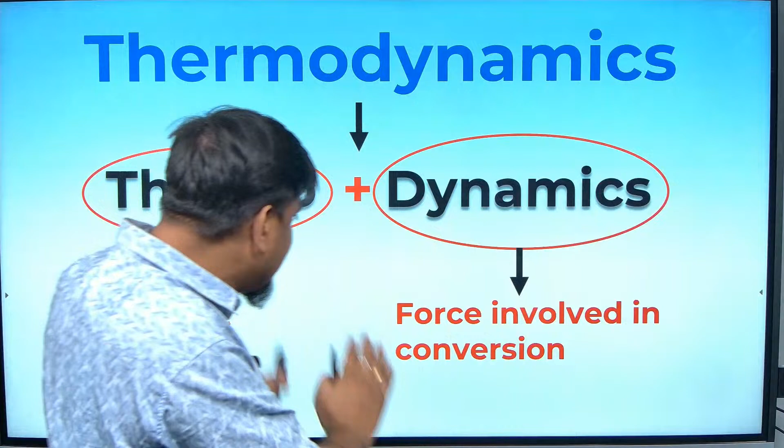So if you remember, you understand that here we are going to learn the meaning of what heat is, and what are the forces involved in this conversion.

So let us define thermodynamics first. As I said, thermodynamics is a branch of physics which deals with the concepts of heat and temperature. The main part here is the interconversion of heat and other forms of energy.

Why are we learning this chapter? Today you will realize that with the help of heat we can do some work, and while doing some work, we can produce some heat. So heat and work are interrelated.

In a lot of mechanical concepts, we use heat engines. If somebody takes mechanical engineering from this classroom, a major part of your four years of mechanical engineering will be learning about thermal effects and thermodynamics only.

That's how important this chapter is, since almost the whole mechanical engineering syllabus is about thermodynamics. So if you are planning to take engineering, it's going to be a very important chapter for you.

Anyhow, let me ask a very basic thing. I have written here that work and heat are interconvertible, that is, work can be made into heat, and heat can be made into work. Generally, if it is cold, what do we do? We rub our hands, right?

Why do we rub our hands? You will say to produce heat. Am I right? When you rub your hands, what happens? Heat is produced. Why and how is heat produced? By the work that you are doing in rubbing your hands, isn't it?

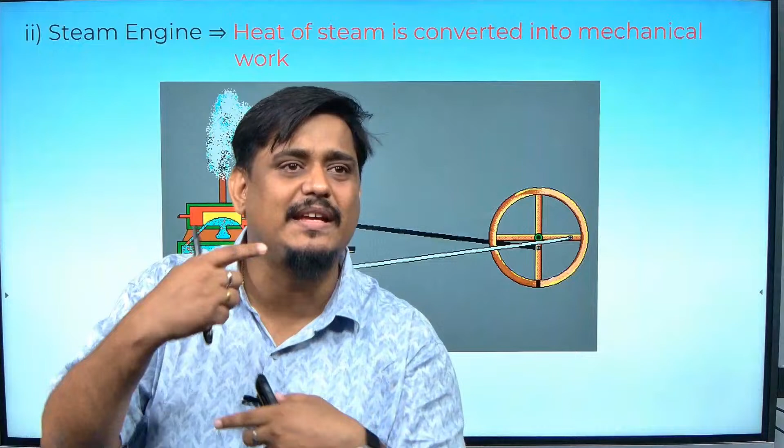Go 60 or 70 years back, all trains had only steam engines, where we used to have a steam chamber, put coal there, burn it, produce steam, and that steam or heat energy would be used to run the engine of the train and carry the carriages, isn't it?

So in this example, we are converting heat energy into work. In the previous example, we converted work into heat energy, and here we are converting heat energy into work. That's what I'm trying to say: heat and work are interconvertible.

Heat can be made into work, work can be made into heat. Remember this in your mind. This chapter is going to, the same thing is going to happen till the end.

Okay, so first we will learn about very basic terminologies. I hope by now, with the help of chemistry itself, you would have learned what is system, surrounding and all these things. Once again, I will repeat anyhow. So what is the meaning of system? Generally, system is anything that you are observing. Even you can become a system for me if I am observing you, if I am studying you, if I am analyzing you.

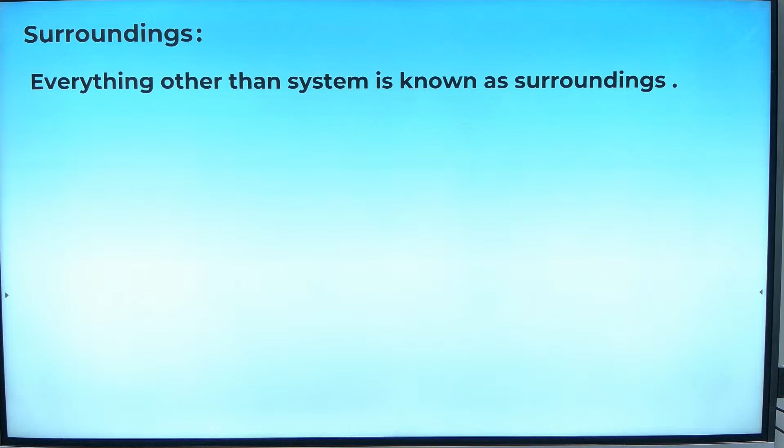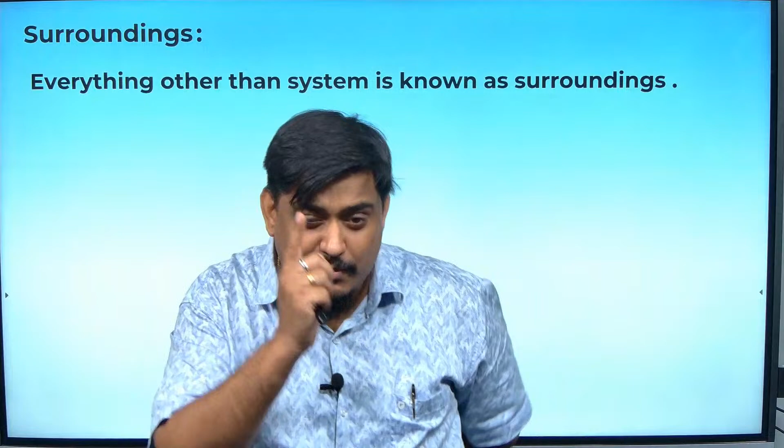So system is anything that is being observed, that is being analyzed, and anything other than system is called as surrounding, isn't it? So for example, if I take Sri Sharan Ram as my system, then everything else except Sharan Ram becomes surrounding for me, and that surrounding and the system is becoming universe for me. Are you getting my point? When I am saying everything other than Sharan, it includes the whole universe.

That's how I am going to say about surrounding. So surrounding is anything, everything other than system, and obviously one more thing, there is a boundary. Boundary is a separation between system and surrounding. Now the boundary is a very important thing here. How the boundary is, how much thick it is. Generally what we study in thermodynamics, we assume the boundary to be a thin boundary, so that it does not absorb much heat, or it does not liberate much heat. So we consider the boundary to be always very thin across the system.

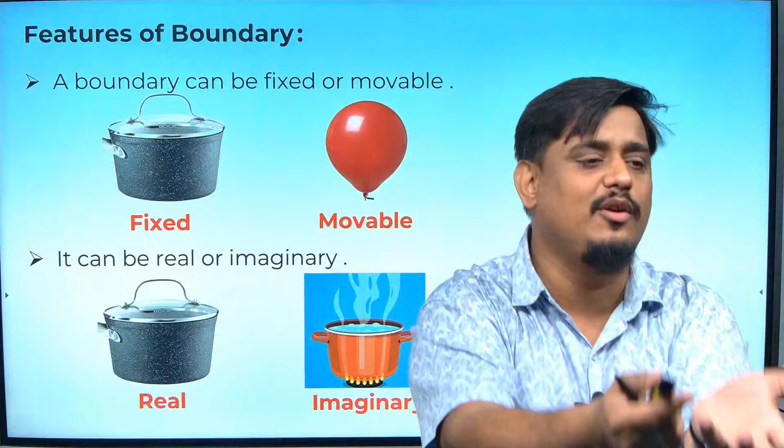Moreover, it can also be real or imaginary. In this case, the boundary is known to you, it is this thing, the vessel. But if you see here, if you are boiling water, if you are making a cup of tea, there is evaporation taking place, you cannot define the boundary of it. It will be an imaginary boundary. So boundary can be real, boundary can be imaginary, boundary can be fixed, boundary can even be a movable boundary.

So remember this, what is the meaning of the word boundary. And I said boundary is always considered to have almost negligible thickness, because you want to avoid any heat absorbed by it or any heat lost by the boundary. To avoid this confusion, we always take boundary to have almost negligible, minimum thickness. Then comes universe. I said universe is everything, combination of system and surrounding. Boundary, everything combined is called as universe.

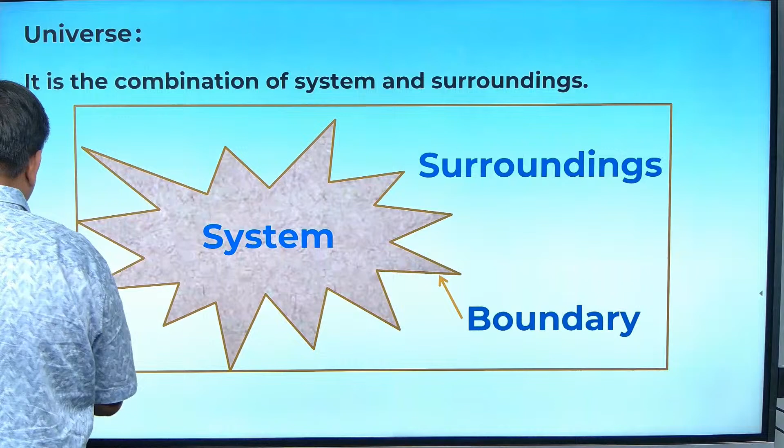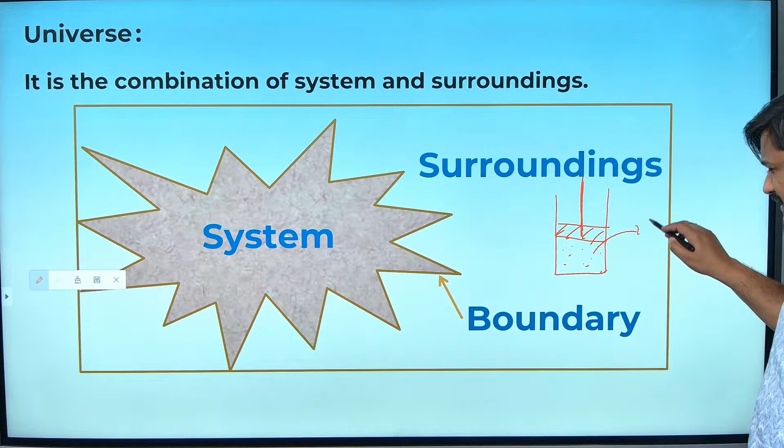So if I am studying something, it is system, everything apart from system is surrounding, and the boundary of system is the shape, I should say. In physics, whenever I say the word system, what should come in your mind is this cylinder. Whenever I use the word system, you should imagine a cylinder with a piston, and the cylinder may be filled with some gas if required. This is called as system. Everything other than system is called as surrounding, and system and surrounding together is called as universe.

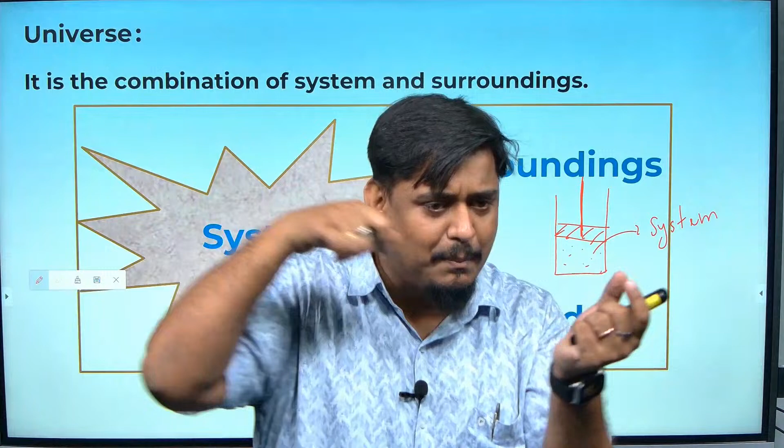The boundary can be of many types, we will talk about that, adiabatic boundary or diathermic boundary, we will talk about that. But here in physics, whenever I use the word system, what should come in your mind? Like a piston and a cylinder. For example, the syringe, the injection that the doctor is using, it's something like that you have to imagine. A cylinder, a piston, a movable piston, and inside the cylinder we may have some gas. Are you getting my point? That is the meaning of system and surrounding in terms of physics thermodynamics.

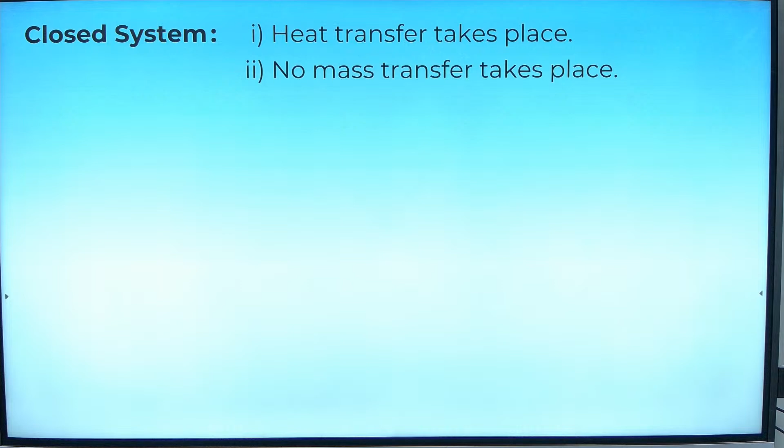Okay, now let us talk about different types of system. So there are basically three types of system: closed system, open system, and isolated system. A system is called a closed system when heat transfer takes place, but mass transfer does not take place. Please mind what I am trying to tell you, this is very important because it will confuse you sometimes.

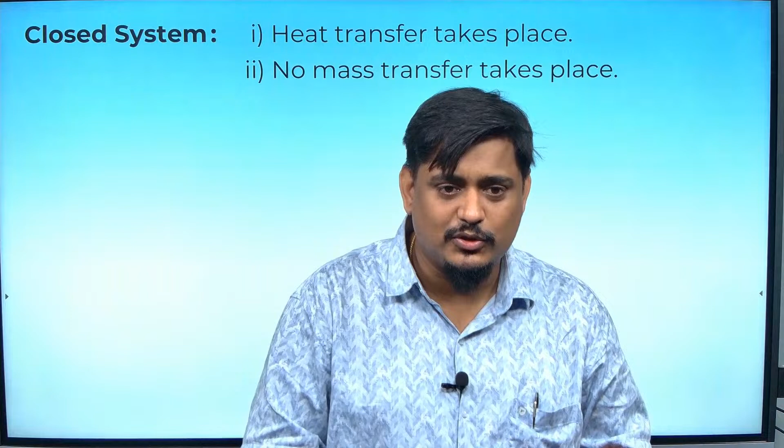In a closed system, transfer of heat is allowed, but mass transfer is not allowed. For example, you are making rice in a cooker. Before the cooker whistles, whatever is inside the cooker, its mass is conserved, because no exchange of mass is allowed between system and surrounding. So we can say a pressure cooker before whistling is an example of a closed system, because when it whistles, it releases some vapor outside, and at that time its mass may reduce.

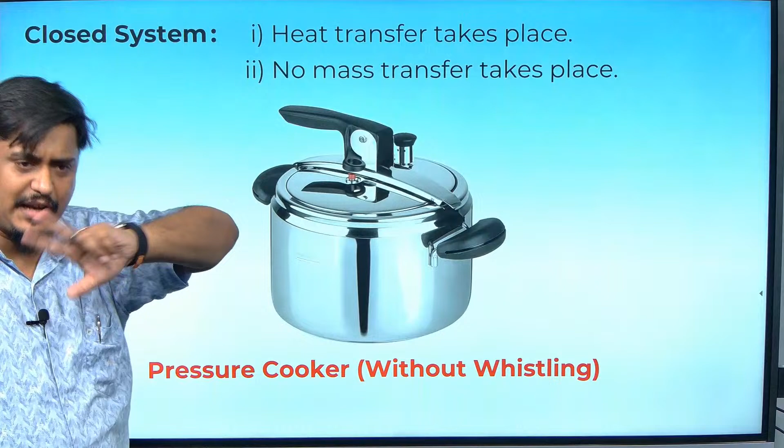So pressure cooker without whistling is the perfect example of a closed system, where we don't have any exchange of mass, but we are allowing heat to transfer. That's why the cooker is getting hot, right? We are allowing the heat to go inside. That is the best example of a closed system.

Then a system can be an open system. What is the meaning of open system? Again, take having tea. We make tea, pour it into a glass and keep it. What will happen? The heat will be slowly lost to the environment. So in that case, heat transfer takes place and mass transfer also takes place. This kind of system is called an open system, where both heat and mass are getting transferred. Example, tea in a cup. Tea is hot, and if you keep it in the cup, I am not saying a significant mass will reduce, but a little bit of milligram mass may reduce, because some of the tea is getting vaporized into the air until it attains equilibrium.

Third system, and a very special type, is the isolated system, where neither heat nor mass will be exchanged. Can you give me an example? A thermoflask, isn't it? Where we don't allow any exchange of heat, and no mass is getting exchanged. So here we are making a vacuum layer between the system and the surrounding, which does not allow the exchange of heat between system and surrounding.

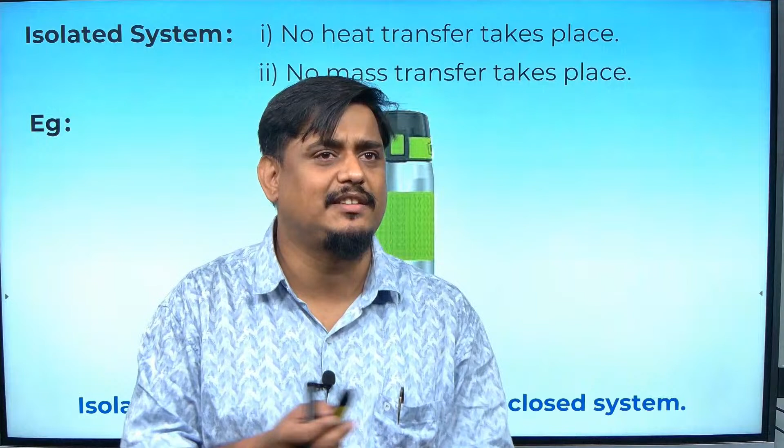So again, I am repeating, there are three kinds of systems. One is open system, where mass and heat both get exchanged. One is closed system, where heat is getting transferred but mass is conserved. Third is isolated system, where mass and heat both are not allowed to exchange. I hope it is clear to you. Very basic thing we are learning.

Now coming to state, these things are becoming a little more technical. Up to now I was talking about only system, surrounding, boundary, and types of system. Now I am talking about the state of a system. State means, for a particular system, what is its pressure, what is its volume, what is its temperature, or in simple words, what are the thermodynamic variables representing a system is called the state of a system. Are you getting my point?

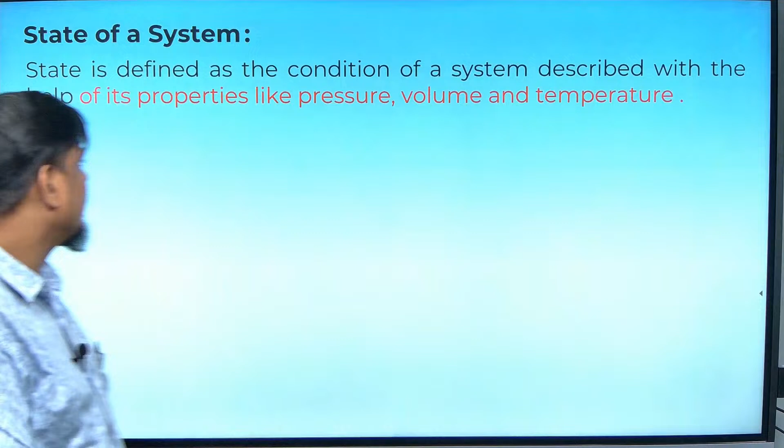Thermodynamic variables means pressure, volume, temperature. These are called thermodynamic variables which directly impact the system. So how can you call a system's state? By what is its pressure, what is its volume, what is its temperature. That defines the state of a system. So how do you define the state? State is defined as the condition of a system described by its properties like pressure, volume, temperature. So for example, I may say P1, V1, T1 as one state, or it may be written as P2, V2, T2, anything. A particular pressure, a particular volume and a particular temperature defines the state of the system.

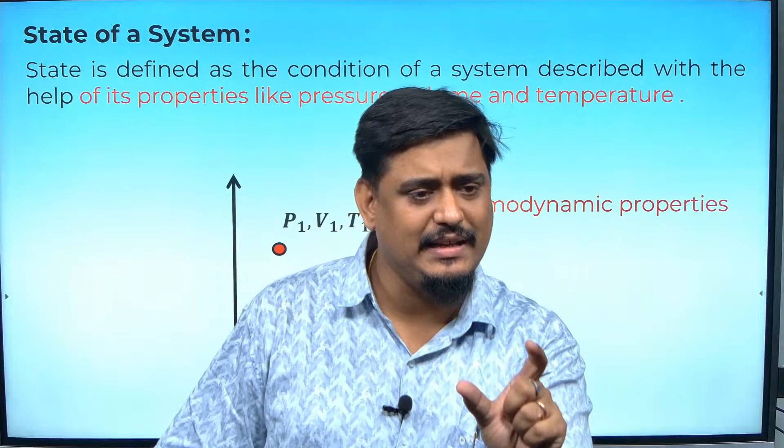Is it clear to you? State means what is the pressure, volume, temperature. It can be some other thermodynamic variable also. Whatever thermodynamic variables are defining a system is called its state. I hope you are clear on this.

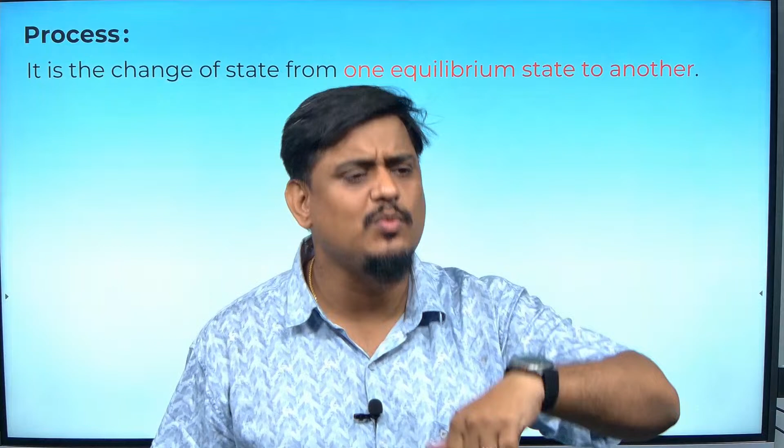So next is process. Process means whenever the state of a system changes from one equilibrium state to another. For example, initially it was P1, V1, T1, you compressed it, and its volume may reduce, the pressure may increase, so it became P2, V2, and T1 may change to T2. So that is called a new equilibrium state attained.

Initially I had a cylinder, I had a piston. It may have a fixed amount of pressure, volume and temperature. I suddenly compress the piston. What may it lead to? It may lead to a reduction in volume, an increase in pressure, or maybe an increase in temperature also, depending upon whether we did it fast or slow, whether the walls are diathermic or adiabatic, something may happen.

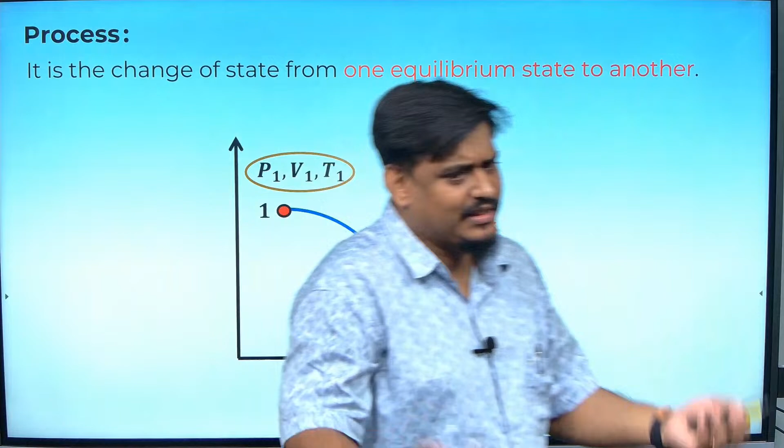If there is a change in the thermodynamic properties or thermodynamic variables, then that is known as the process. So in this case, suppose I am having P1, V1, T1, and it is changing to P2, V2 and T2, then there is a process taking place. The process can be expansion, it can be contraction, it can be anything. So if I draw one graph for you, can you try to find what is this? Suppose I am drawing.

Anything, I am just drawing a random thing here. Think and say what is happening in this process. I will make it simple. Let this be the second question, let this be the third question. First, let me draw it like this.

As the volume is increasing, the pressure decreases. So can I call this expansion or contraction? Contraction, sir? No, volume is decreasing here. Volume is increasing there. Then it's expansion. It's expansion.

How many of you say it is expansion? All of you? Literally all of you? Anybody says compression? You can unmute yourself and speak. Anybody thinks it is compression? Anybody? Kirti, what do you think? It is expansion? Why? Give a try, you may be right or wrong.

Secondary - see here, is volume increasing or decreasing? Kirti, tell me. Volume is decreasing, think and say. Volume is increasing, what about pressure? Increasing or decreasing? So if the volume is increasing and the pressure is decreasing, what can that be - expansion or compression?

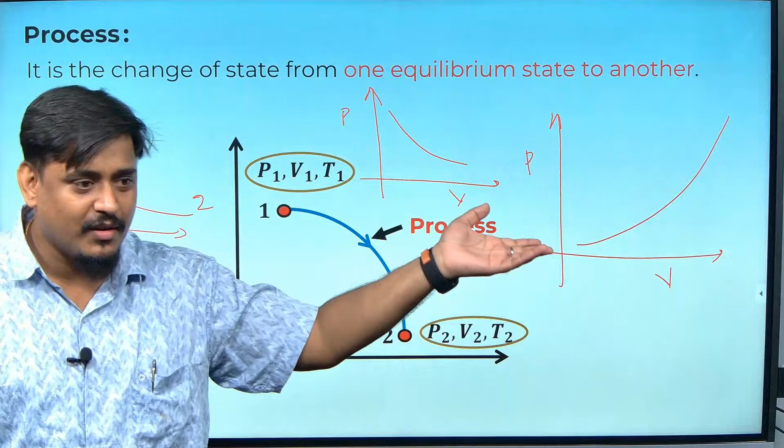We cannot say it is an expansion graph, we cannot say it is a compression graph also. It may be expansion, it may be compression, totally depending upon the path. I'll go and talk about the path next. If the path is like this, then yes, it is expansion, because from 1 to 2 the volume has increased and the pressure has decreased. But if somebody draws the arrow like this, it means volume has decreased and pressure has increased - it's compression, isn't it? Don't you agree with me? So always comment on expansion or compression purely depending upon the arrow sign.

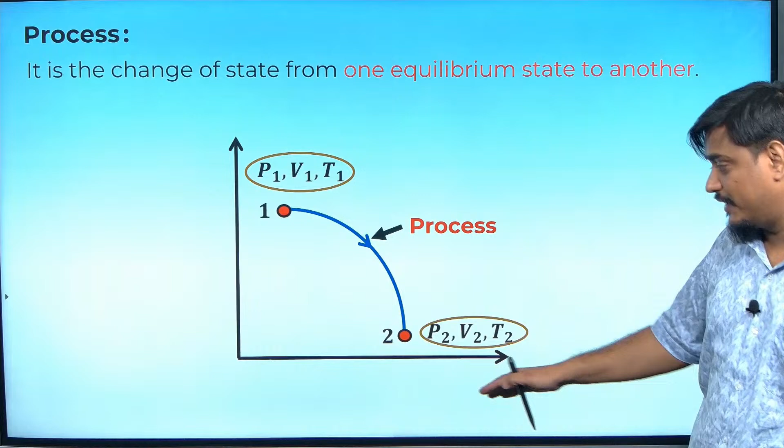So in this case, if we don't know what is P and what is V, we cannot comment whether it is expansion or compression. The graph drawn here by default - if I ask you whether it is compression or expansion, you cannot comment. It is P1, V1, T1, P2, V2, T2, but whether this is V or this is P is not mentioned. Until they mention it, you cannot comment. It may be compression, it may be expansion, it can be anything. So don't judge a graph just by imagining what is P and what is V. Be very careful in understanding which side is pressure, which side is volume, and how it is moving from which point to which point. Okay, can I proceed further?

Okay, I hope it is clear to you what is the meaning of process. So now, what are the different types of process? I have seen children confusing in this, I'll tell you why. One is called reversible process, another is called irreversible process.

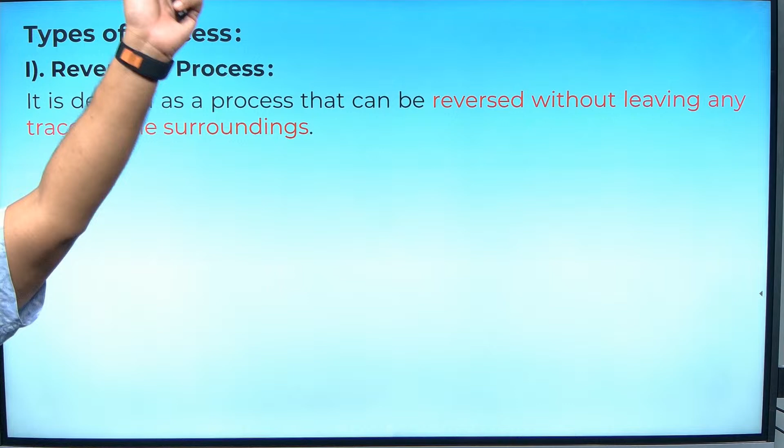What is the meaning of reversible process? Obviously, the process that can be brought back to its original state. That is, if it is having P1, V1, T1, it may go to P2, V2, T2, but it has to return back to P1, V1 and T1. It is defined as the process that can be reversed without leaving any trace on the surroundings.

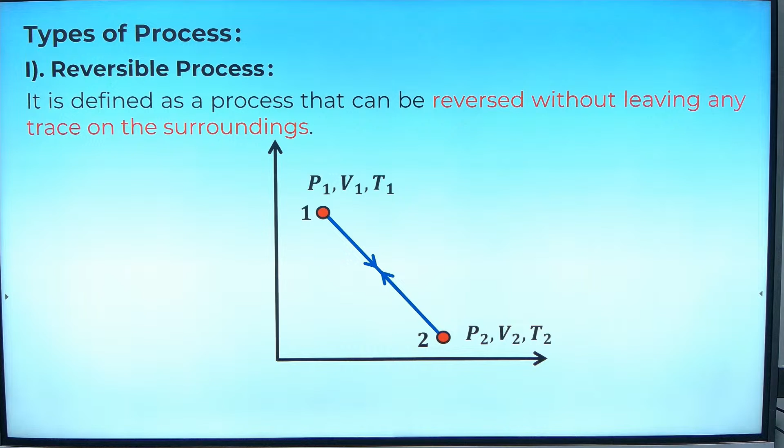That is important, many of you are not minding that. Let me draw a graph and explain this to you. So here, P1, V1, T1 has become P2, V2, T2, and once again from P2, V2, T2 it has become P1, V1, T1. This can be called a reversible process, where the system has attained its initial values of pressure, volume and temperature. I have made an example for you too.

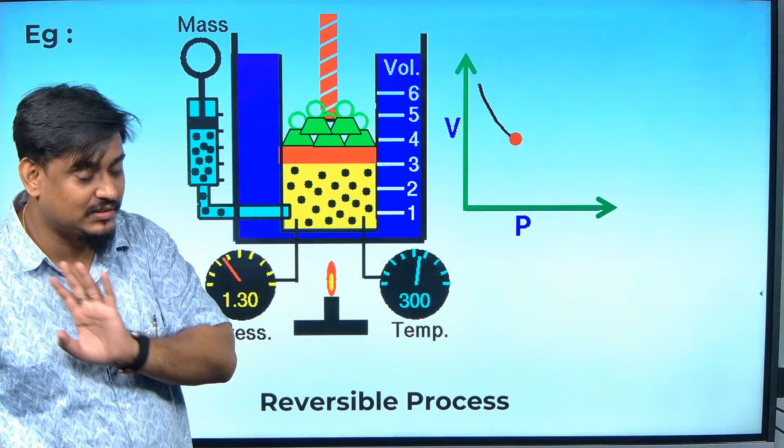See here, the pressure is increasing, the volume is reducing, and once again the pressure is reducing, the volume is increasing. So the path from volume 1 to volume 2, from pressure 1 to pressure 2, is taking the same path while moving back and forth. Remember that, because what I am going to draw next will also look reversible to you.

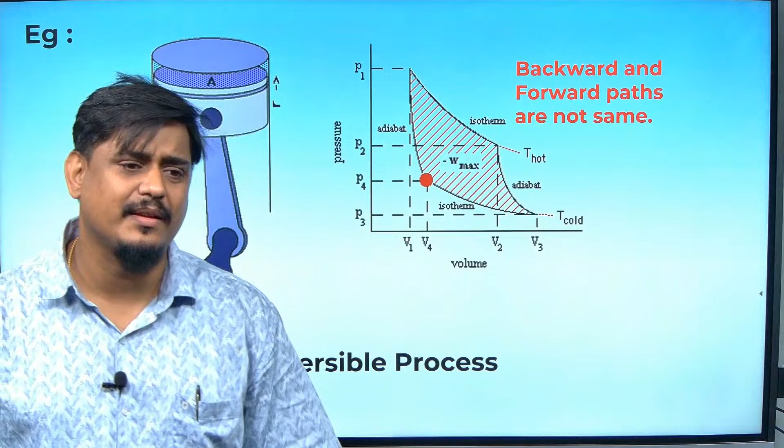But what am I calling this process? Irreversible. Why? Because the path is different — backward and forward paths are not the same. This is where children get confused. They will think this is a reversible process only. No, it is cyclic. Cyclic is different from reversible and irreversible.

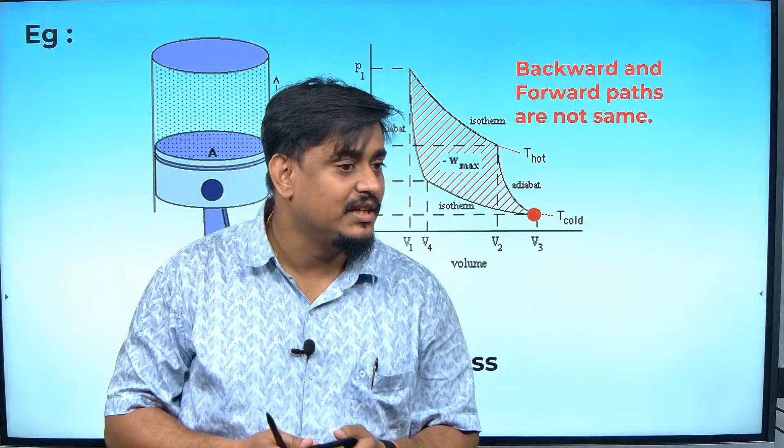Many children think that a reversible process must be cyclic. Not like that — an irreversible process can also be a cyclic process, like here. So the main difference between reversible and irreversible is: in reversible process the path remains the same, but in irreversible process the path is different. Are you getting my point?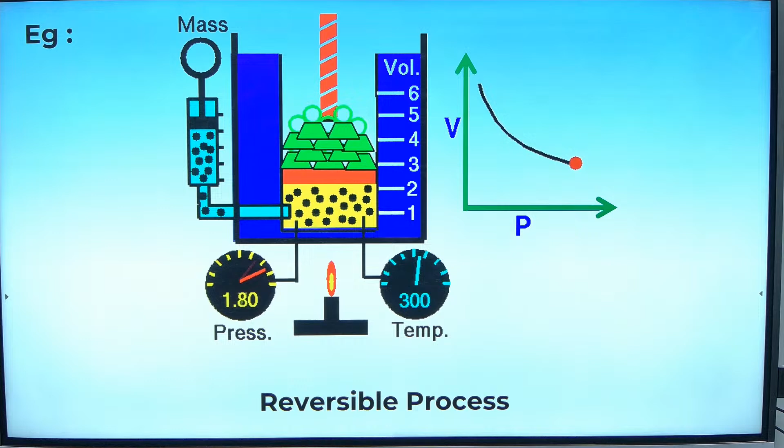Let me go back and talk about this once again. I hope you are understanding this. In the case of a reversible process, the volume has decreased, the pressure has increased, but once again the volume becomes old and the pressure becomes old — and the path it follows is the same, not a different path.

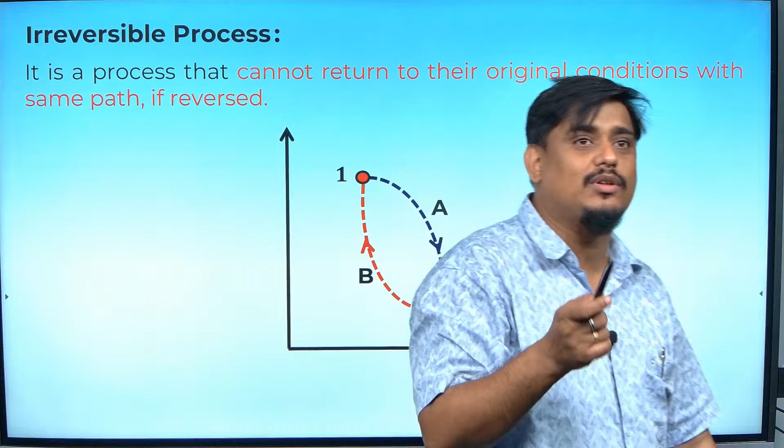So in whichever path it came forward, in the same path it goes backward. But in the irreversible process, the path is different while going back to the original state. It would have attained the same state, but the path it took to come back to that same state is not the same. I hope you are understanding this — 1 to 2, and 2 to 1.

If it is not the same path, then it can be considered an irreversible process. So a reversible process is the one in which the forward and backward paths are the same. Are you getting my point?

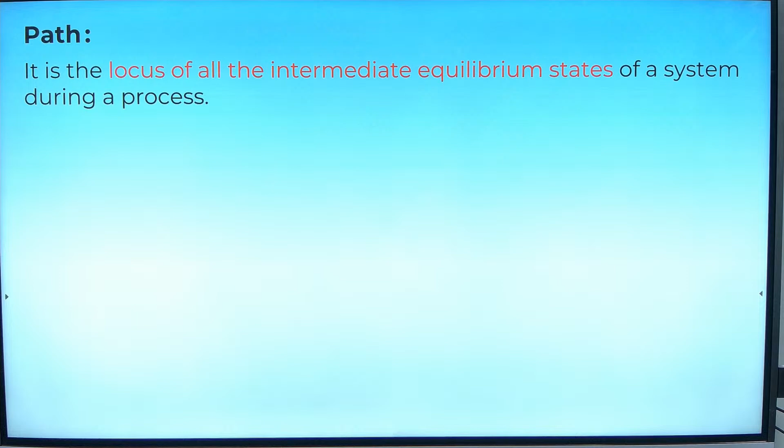I hope so. Fine, now let us talk about path. Path means the locus of all the intermediate equilibrium states of the system during a process. For example, if I have a system like P1, V1, T1 going to P2, T2, then a third point also — this is a path of the system. If point 3 comes back to point 1, it becomes an irreversible path, but a cyclic path.

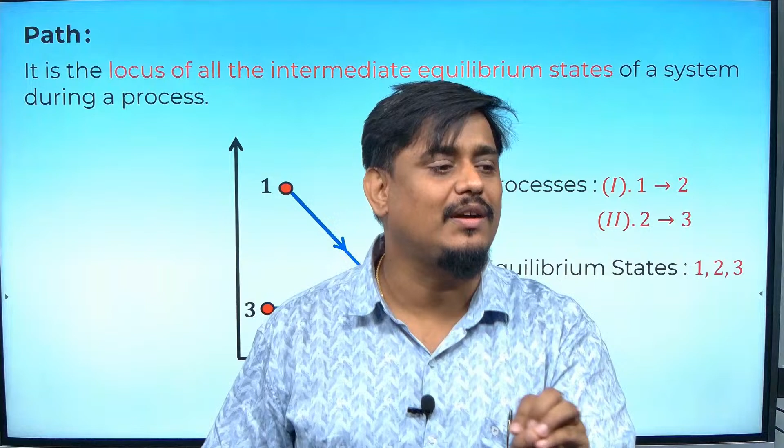Are you getting cyclic? Because from where it is starting, it ends at the same point. See, when I defined reversible process to you, I did not say that if the starting and ending points are the same, it is reversible. I did not say that. I just said that the initial state of the system, the same state can be achieved by following the same path.

Only then is the system called reversible. If the final and initial states are the same, but the path taken is different, then the process is irreversible. I hope you are getting my point. So a path is defined as the locus of all the intermediate equilibrium states.

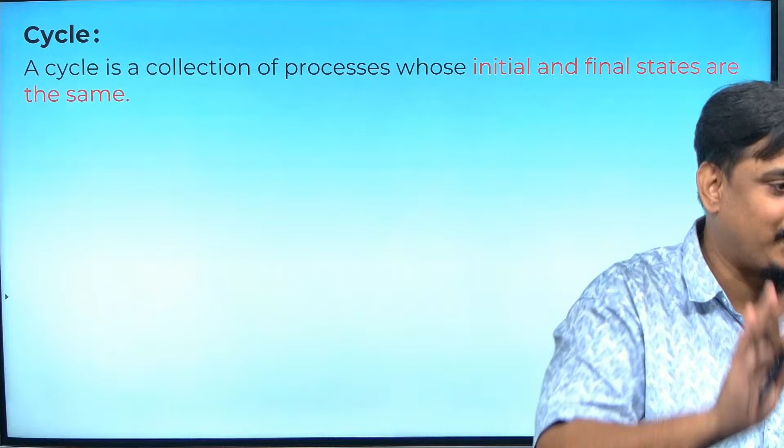Coming back, cycle, as I told you. A cycle is a collection of processes whose initial and final states are the same. Whatever I have drawn till now is actually cyclic only, I have not drawn any non-cyclic process. When the gas has gone from P to V and gone back, that's cyclic. Even the previous graph is cyclic. If the starting point and the ending point are the same, then the process becomes cyclic.

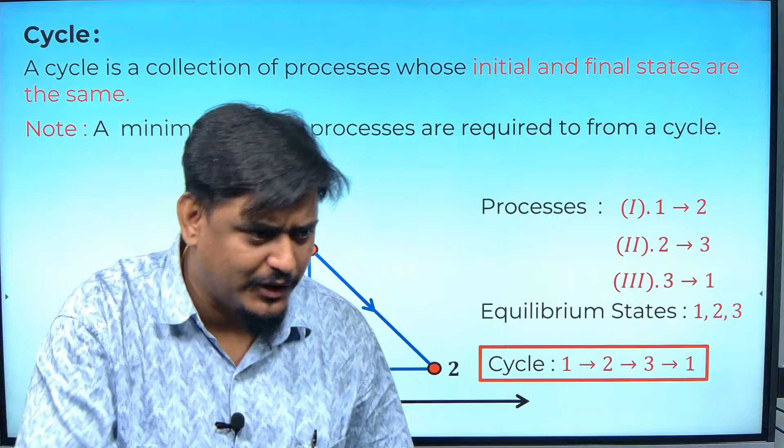Are you getting my point? In this case, there is a path P1, V1, T1, a second path P2, V2, T2, and a third, going 1 to 2, 2 to 3, and 3 to 1. This process can be called a cyclic process, because it has once again reached back to 1. Started with 1, went to 2, went to 3, then once again back to 1. This kind of process is called a cyclic process, because there is a cycle from 1 to 2 to 3 to once again 1. I hope you are understanding what I am trying to tell you. Now comes a very important part.

If you don't understand this, the whole of thermodynamics will become miserable for you. What is the meaning of state function, and what is the meaning of path function? Even in competitive examinations, these terms will frequently come up, and you can understand them only if you are clear on the concepts of state function and path function.

Kirti, you are there in the class, right? Not doing anything else, no? I hope. Okay, coming back.

So, state function. If you see the definition, it is defined as the function which depends only upon the end states of a system. Remember in the chapter work, energy and power, I talked about conservative and non-conservative fields. Gravitation is a conservative field, friction is a non-conservative field. You can recall something like that here.

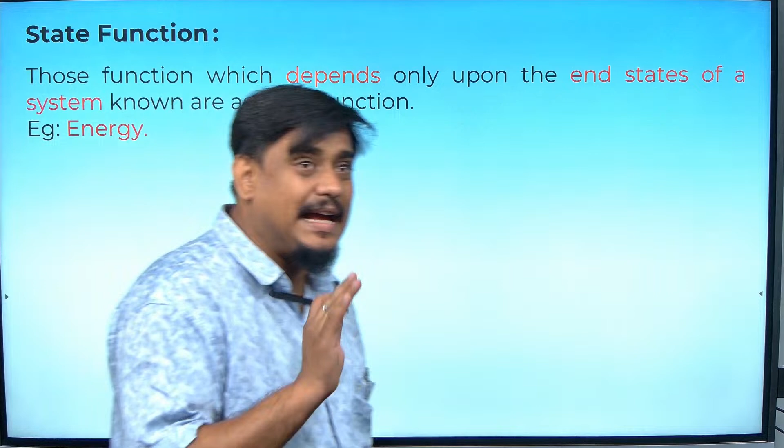Anyhow, what is the meaning of state function? If the function depends only upon the end states of a system, that is, it depends only on the end. It is independent of the path. This kind of function is known as state function.

Energy is a state function, remember that. Whether a process is shifting in this path, the B path, or the C path, energy is independent of the path. So energy is a state function, because a state function depends only upon the end result, the end state. It does not depend upon the path that you are taking.

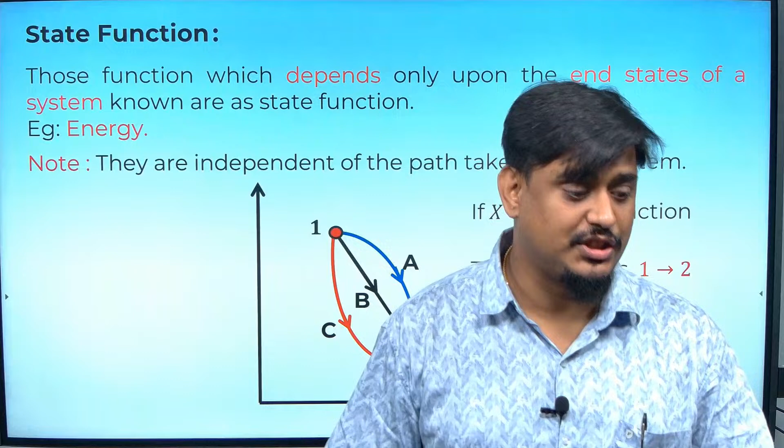Then that function is called a state function. Example of a state function: energy. But in another case, if I am moving from one state to another in path A, and a second process moves in path B, or a third in path C, they are different. That is, the work done along this path, this path, and this path are different, or the heat along this path, this path, or this path are different. Then they are called path functions.

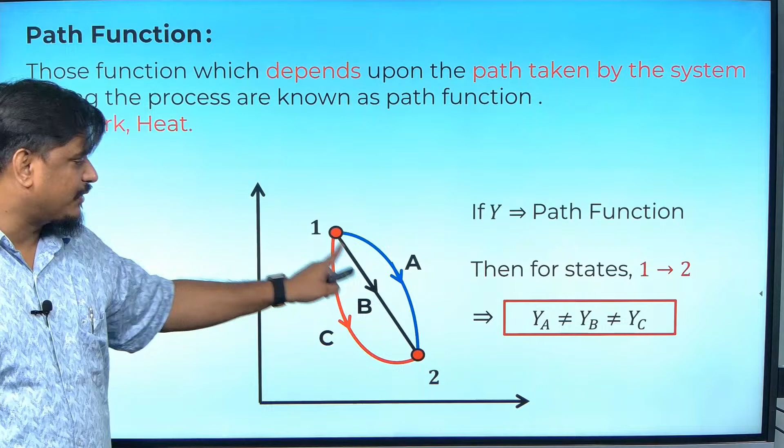As the name says, that function which depends upon the path. If the path is different, the function will give a different result. It does not depend upon the end result, it depends upon the path. That kind of function is called a path function. Example: work and heat. So in this case, the path function of A, the path function of B, and the path function of C are not the same.

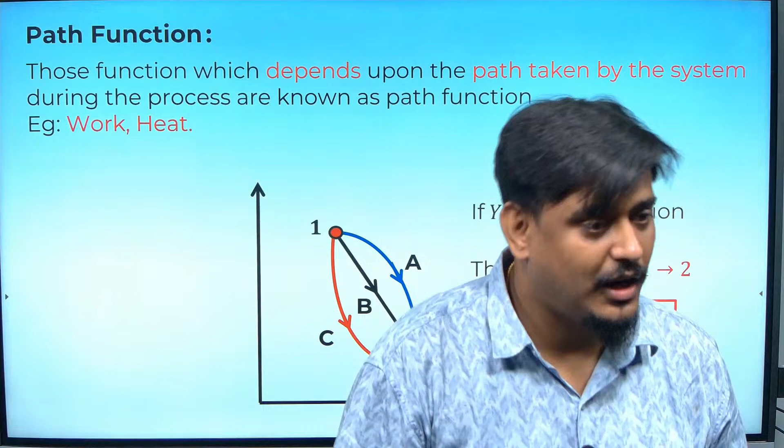Coming back, let us now talk about temperature and the zeroth law. Up to here things are clear. State function example: energy. Path function example: heat and work done. As of now, remember that.

Okay, so I hope you are clear with reversible process, non-reversible process, everything. Slightly confused, sir. In what? I don't get the difference between work and energy right now.

Work and energy? Yes. I understand the problem, because work is also joule, energy is also joule. So how do they differ? Even heat - heat is also joule only, no man? Yeah, heat and joule, calorie or joule, yeah. So you may feel like work, heat, energy all sound the same to you, but why are they calling something a state function, something a path function, isn't it? That's the doubt, am I right?

You will understand now. In thermodynamics, we deal with work differently, heat differently, energy differently. When you write del Q equals del U plus P del V, which is del W, what is the meaning of del U there? Del Q first - heat energy supplied. What is del U? Internal energy. And what is W? Work done. So work, heat and energy are not taken as the same - they are treated differently in thermodynamics.

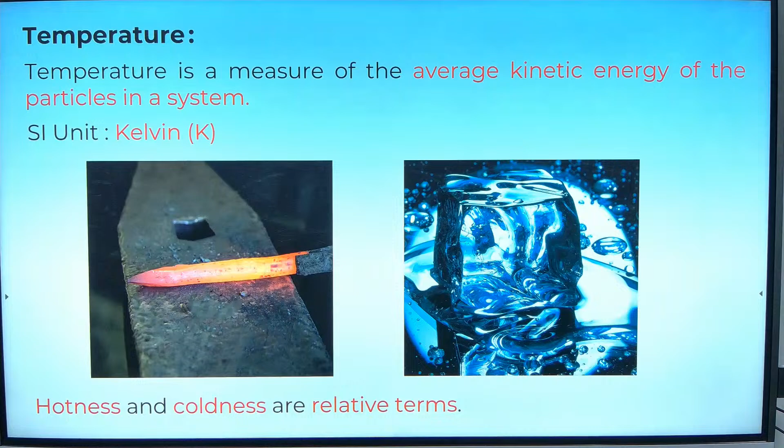I talked about hotness or coldness to you in the previous chapter, thermal properties of matter. I told you what is the meaning of heat, what is the meaning of cold. So hot and cold are different from heat - heat can even be cold, isn't it? That means heat is just the flow, moving from hot body to cold body or vice versa. It can be anything. But remember that temperature is the measure of average kinetic energy of a system.

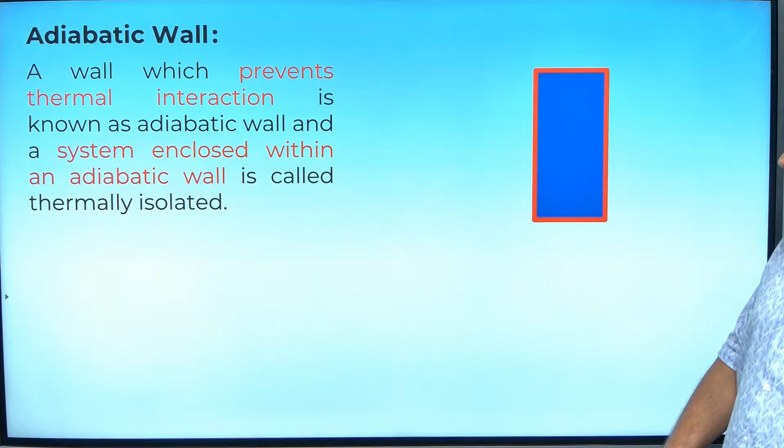So an adiabatic wall is one having an insulating nature. It will not allow the exchange of heat between two systems or between system and surrounding. For example, if you have an adiabatic wall, the temperature will not be allowed to pass through it, because adiabatic will not allow exchange of heat between one body and another, system and surrounding, or between two gases. That is called adiabatic.

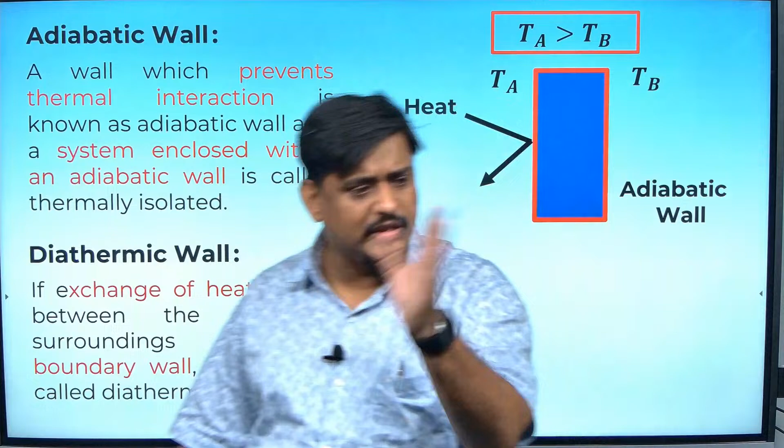Another wall is called the diathermic wall. Diathermic means it will allow the exchange of heat between two systems or system and surrounding, and it will have, you can imagine, something like pores between them - whatever heat you supply will pass through it. This kind of wall is called a diathermic wall. So adiabatic means it will not allow interaction of the system and surrounding, while diathermic will allow the exchange of heat between system and surrounding.

Are you clear on this? Diathermic means the system will allow exchange of heat, and adiabatic means exchange of heat is not allowed. I hope you are understanding.

Now, there are two words here, thermal equilibrium and thermodynamic equilibrium. How are they different? Equilibrium means something should become the same, balanced. Thermal equilibrium is the temperature of two gases becoming the same. If two gases attain the same temperature, they are said to be in thermal equilibrium. Thermodynamic equilibrium means not only temperature, but other thermodynamic variables like pressure and volume also become the same. That kind of equilibrium is called thermodynamic equilibrium.

Are you getting my point? If two gases have the same temperature, they are said to be in thermal equilibrium. If two gases are at the same temperature but different pressure and volume, they may not be in thermodynamic equilibrium, only thermal equilibrium. They may be in thermodynamic equilibrium only if their pressure, volume, and temperature all become the same. Only temperature becoming the same means they can be in thermal equilibrium, not thermodynamic equilibrium. That is, thermodynamic equilibrium is thermal equilibrium plus physical equilibrium plus chemical equilibrium, all together. But thermal equilibrium means only about temperature. Is it clear to you? Thermal means only temperature; thermodynamic means all the thermodynamic variables must be the same.

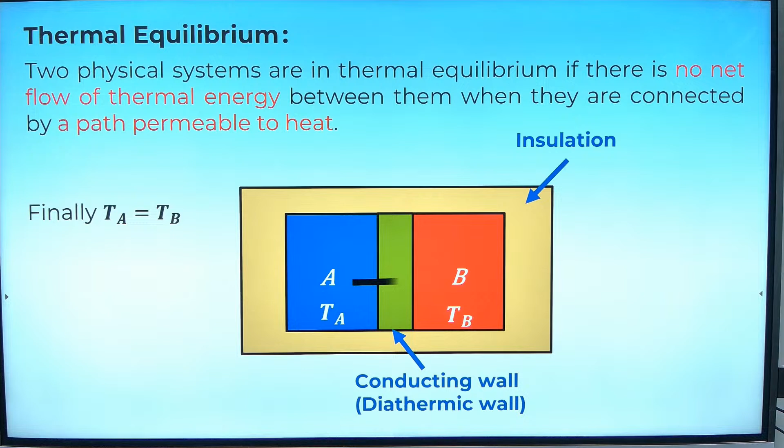So A and B are there, and you connect them using a conducting wall. What will happen? Heat will go from the hot body to the cold body. Within a few seconds, they will attain equilibrium, and that equilibrium is called thermal equilibrium. Initially Ta may be more than Tb, but slowly Ta will become equal to Tb, and then they have achieved thermal equilibrium. If thermal equilibrium is achieved, no heat transfer will take place after that, isn't it? I hope you are clear with the meaning of thermal equilibrium.

Let us talk about this now, a very simple question anyone can answer. If you use an adiabatic wall in place of a diathermic wall, is it possible to achieve thermal equilibrium? No sir, obviously no, very simple. Why no? Because no transfer of heat is allowed between two systems if the wall is adiabatic.

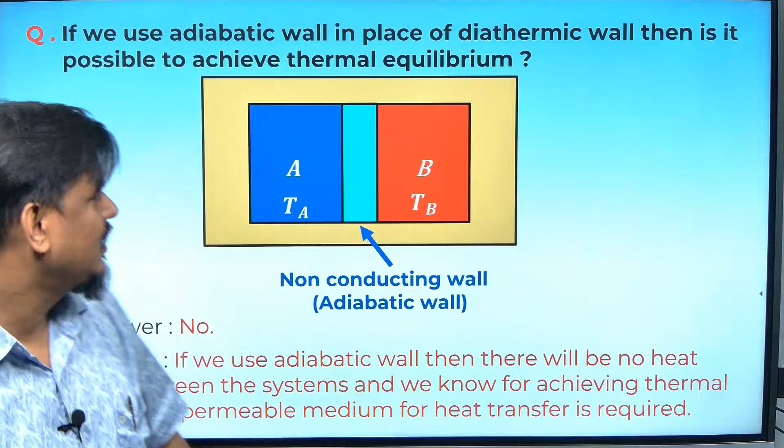Very simple, right. Now let us talk about the zeroth law of thermodynamics. If you ask me why zeroth law, why not first law? Every other law, Kepler's law or Newton's law, we studied first, second, third in order. But why here do we study zeroth, first and second? We could have studied first law, second law, third law of thermodynamics. Why are we studying 0, 1 and 2?

Any idea? So no. Does anybody know the history behind it? Why are we not calling the laws first, second, third? There are 3 laws totally in thermodynamics, but we call them 0th, first and second. Why can't we change it to first, second and third?

Sir, it might be like when they found the first law, after that they would have found this law, but this law might be like, they thought that if they would have found this before, then something like that.

Yes, good, you are correct, absolutely correct. The zeroth law was found after the first law, but it was more basic than the first law. So they put it before first; they had no option but to put 0 only. Since the zeroth law was found after the first law, naming it second or third law would have been irrelevant, the world would later say, what is this? Already the conclusion of the zeroth law is contained in the first law. So that is why they named this law the zeroth law, because it is more basic than the first law of thermodynamics, a very basic law.

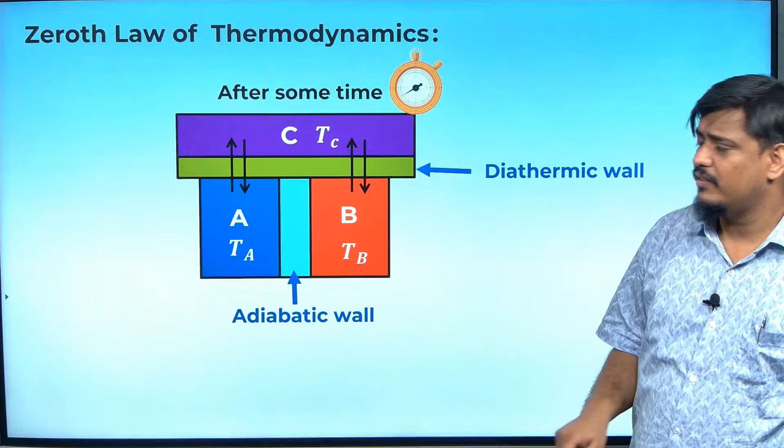I hope it is clear to you. Now what happened? They were left for some time. After some time, don't you think that A and C will attain thermal equilibrium? Same way, B and C will attain thermal equilibrium. So after some time, A and C will become equal, and the same will happen with B and C also.

Then they removed the wall, and now they made an adiabatic wall where there was diathermic initially, and now they are keeping a diathermic wall here. Do you think that now any exchange of heat will take place between A and B? No, it's impossible, because all of them have come to the same temperature.

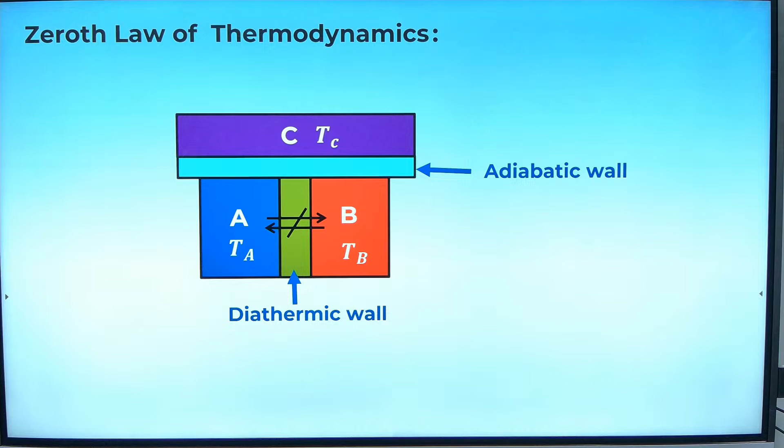A becomes equal to C, B becomes equal to C, so A will automatically become equal to B. If A and B have become equal, then where is the question of heat exchange between A and B? So when we kept a diathermic wall here and checked whether there is any exchange of heat happening or not, no heat is exchanged. This whole experiment is now written as a statement.

What can that statement be? If system A and system B are in thermal equilibrium with system C, then system A and system B are also in thermal equilibrium with each other. Simple, right? If A and B are in thermal, not thermodynamic, thermal equilibrium with C, then A and B are also in thermal equilibrium with each other. I hope you are getting my point.

Anyhow, so the same thing I have told is mentioned here: if two thermodynamic systems are in thermal equilibrium with a third one, then they are also in thermal equilibrium with each other. That is the zeroth law of thermodynamics for you. Simple, you can write it later.

So the first law is actually more linked with the thermal properties of matter chapter. If you are not good in that, you will struggle here. That is when I taught you del Q equals mc delta T, and del Q equals ml, that part will be used here. So caution: if you are not good in thermal equilibrium, today itself go and become good in it. You have the notes, you have the videos, you can see the video, take the notes also. I have taught in detail about what is the meaning of thermal equilibrium, and what is the meaning of del Q equals mc delta T — change of state without changing temperature, and change of temperature without changing state.

You remember or not? Q equals mc delta T. Q equals ml. Yes sir, calorimetry, yes sir. Calorimetry, very good. So if you are good in calorimetry, then this is nothing, just a continuation of that. If you are not knowing calorimetry, then you have to know calorimetry before starting the first law of thermodynamics. Okay, coming to the first law, what does it say.

So before I start talking about the first law, you must understand the meaning of internal energy, right? When I say the word internal energy, when there is a gas in a system, it means gas molecules are there. And these molecules, do you think they are at rest? No, they are in random motion, here and there, moving. If they are in motion, it's very certain that they will possess some kinetic energy.

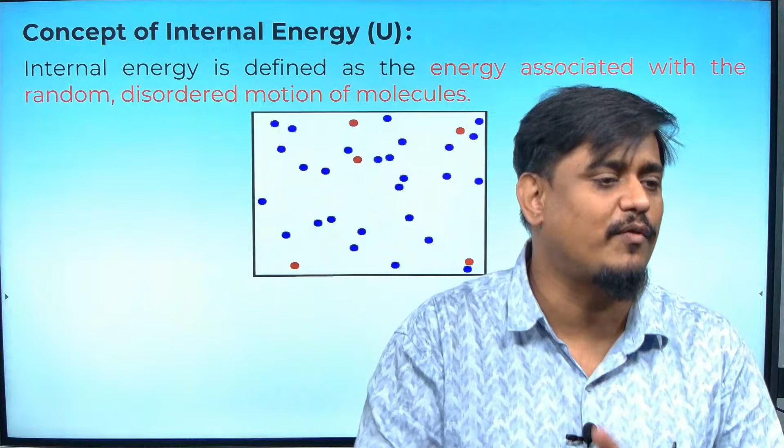Second, their positions or configuration will lead to potential energy. What is the meaning of potential energy? Energy possessed by a particle by virtue of its position or configuration is known as potential energy of the system. So this internal energy is basically the sum of both kinetic and potential energy.

Once again, kinetic energy is coming because of the motion of the particles, and potential energy is coming because of the virtue of its position or configuration. Because of its configuration it will have a certain value. Suppose I am asking this question to you, it is important, please pay attention.

If I am having a system, and I am having this piston which is immovable, I am not allowing the piston to move, and there is some gas inside this, and I heat the gas, what will change? Kinetic energy, sir, kinetic energy will change of the particles. Exactly. So that's why I say kinetic energy is a function of temperature.

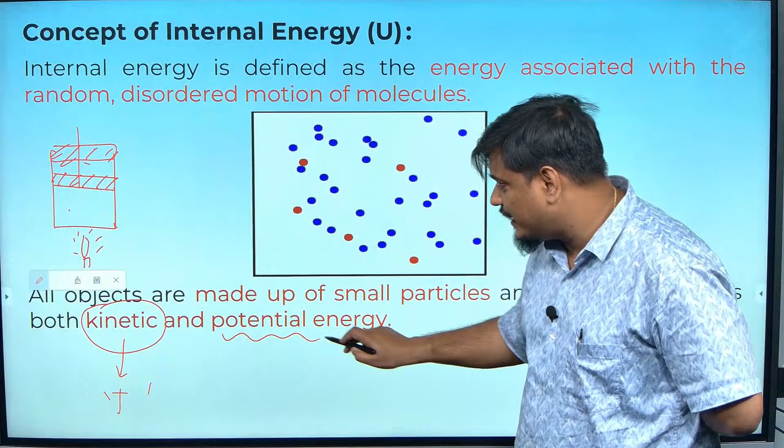Remember this. Second thing, if I allow the motion of the piston, the piston starts going above. If the volume has increased, don't you think the configuration would have changed? If the volume has increased or decreased, the configuration of the gas molecules will change. Do you agree or not? Can I say that potential energy is a function of volume?

This may come in the examination. Kinetic energy is a function of dash - it is a function of temperature. Potential energy is a function of dash - it is a function of volume of the gas. I hope you are getting what is the meaning of volume and what is the meaning of temperature and how it is related. Anybody has doubt in this? I hope no, very basic thing we are learning.

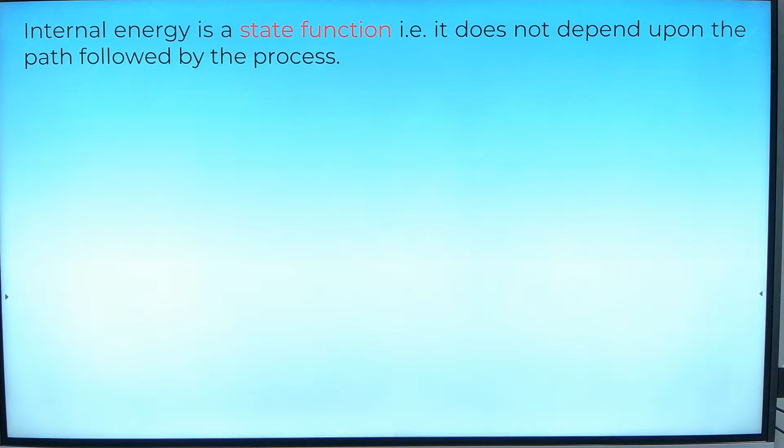So next, again, internal energy is a state function, that is, it does not depend upon the path followed by the process. So I told you energy is a state function, in the beginning itself I told you. Energy is a state function. What is the path function? Work done and heat. Good.

So now it means whether a particular system is moving from 1 to 2 in path A, path B or path C, what will remain same? Its internal energy is a state function, so it will not depend upon which path a system is following. That's why I told you, you should remember what state function is and which parameters are state functions. Energy is a state function, right? So UA is equal to UB is equal to UC. That's what it is mentioned.

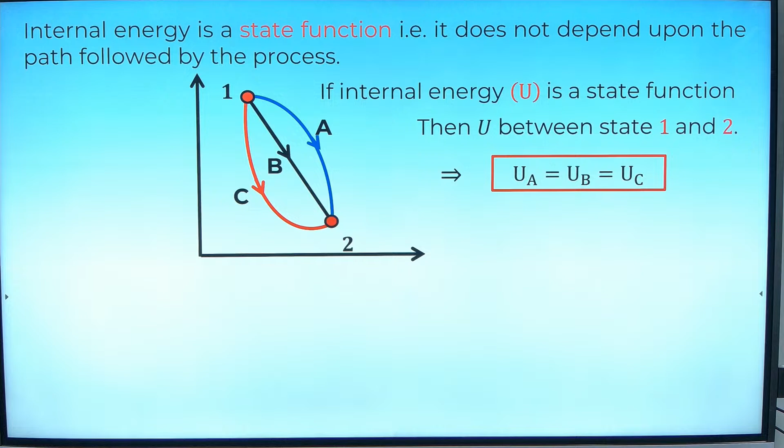Fine, so now let us talk about one simple question. What is the change in internal energy of a process which has final and initial states exactly same? What will happen? Options I will give. Zero. Common sense, sir. Zero, sir. This kind of questions, if it comes, you should dance - it will never come, okay. Obviously it will be zero.

Fine, now let us talk about heat. Because if you remember, most of you may know by now that the first law of thermodynamics is Q, work done, and U. So I am going to talk about each thing one by one, and I will assemble all three and make the equation. So first I talked about internal energy, now I am talking about heat.

Heat is the energy in transfer to or from a thermodynamic system by mechanisms other than thermodynamic work or transfer of matter. So suppose I am putting a burner below a system, what am I supplying? I am supplying some heat. So it is energy in transfer to, like if I am heating by using a burner, or from, meaning the system is heating the surrounding, that is from the system it is coming. A thermodynamic system by mechanisms other than thermodynamic work, that is, you should not move the piston.

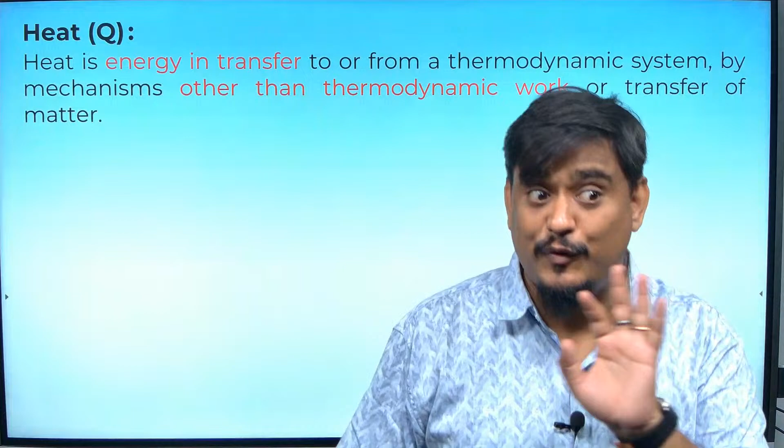Are you getting my point? That is work done, it cannot come under the condition of heat. That may also produce heat, right? If you have a piston and suddenly you move it, it will produce some heat, but that is not the heat I am talking about. This heat is externally supplied or removed from the system because of its interaction with the surrounding. So be clear in the meaning of heat. This heat is not produced by any thermodynamic work. I hope you are understanding something.

So suppose there is a high temperature, obviously the heat flows from where to where? From high to low temperature, always remember that. So heat always flows from high to low.

Now sign convention. Sign convention is also very important in this. Positive, negative, you should know, because when you solve a numerical, it will be used. So if heat is applied, it is positive. If heat is given away, it is negative. Common sense: if heat is coming inside a system, it will be taken as positive heat. If heat is given away by a system, it is taken as negative.

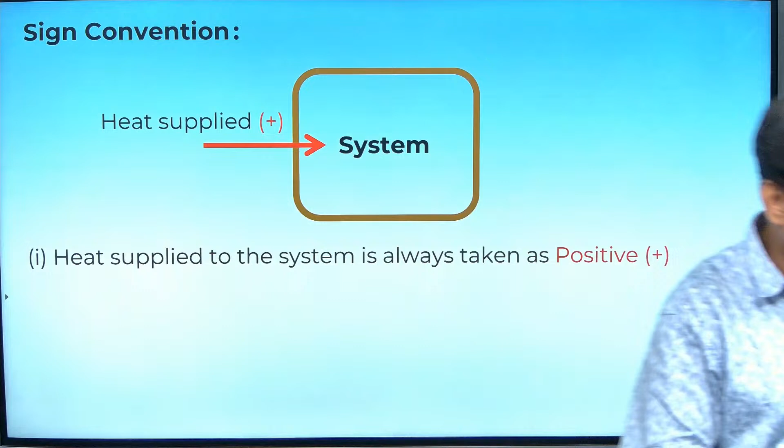Yes, so I hope you are clear in the meaning of sign convention of heat supplied or heat rejected. So once again, as I told you, heat is a path function. If it is a path function, it depends upon which path it is taking. So types of heat, once again, this comes from thermal properties of matter.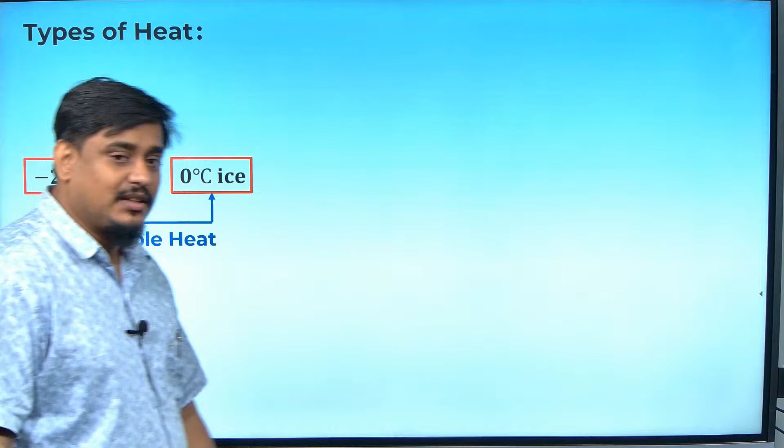I said if there is a change in temperature, what is this? Change in temperature is what? Q is equal to mc delta T. You have the mass, if you have the delta T value, you can find the heat supplied for that, isn't it? And if it is changing its state at a constant temperature, what is this called? Latent heat, remember this? In this case, latent heat of fusion. So they are calling it latent heat.

Same way, the water is going from 0 degree water to 100 degree water. What is happening? Sensible heat, they will write. Heat causing change in temperature, yes, sensible heat. And when it is going from 100 degree water to 100 degree steam, what is going to happen? Latent heat of what? Vaporization. Yes, this is vaporization.

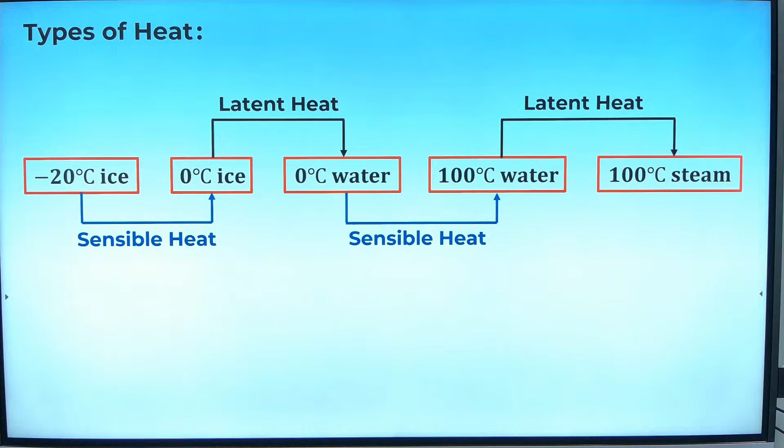If you are clear in calorimetry, this is child's play for you, isn't it? This we have learned in very detail in the thermal properties of matter. I hope you remember this. So it is a form of heat which is responsible for change in temperature of system, and latent heat is the heat responsible for change in phase. I hope you know this. This heat is change of temperature, this heat is change of state. Same way, change of temperature and change of state, in detail you have studied, please go through the video if you want.

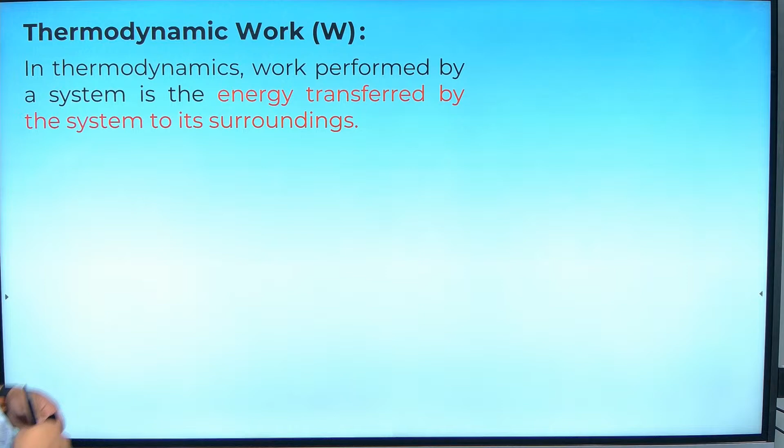Okay, then comes the work. We talked about heat, we talked about internal energy. Let us talk about thermodynamic work, because we are going to link all these three only. So again, work performed by a system is the energy transferred by the system to its surrounding, or it can be vice versa also, heat supplied by the surrounding to the system, isn't it?

So for example, if you see some water may be boiling here, or some kind of process, heat is produced, and by this production of heat I am doing some work, isn't it? The work is done if you are supplying some energy to the system by a surrounding, or transferred by a system to the surrounding, or surrounding by a system, any way it can be. So work is a form of energy, but it is energy in transit.

Mr. Abhinand, understand this.

Work is a form of energy, but it is not that energy that we are supplying, it is the energy in transit which is keep on moving, it is doing some work, isn't it? Can you see from here? So yes, that is thermodynamic work, okay.

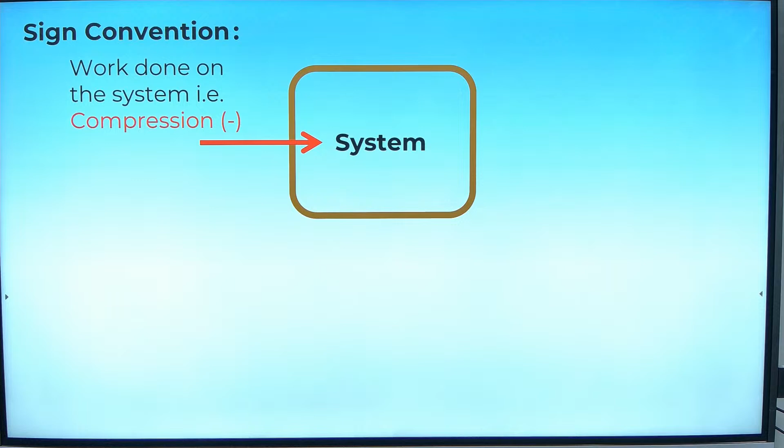So now if you see a closed system, let us talk about this when we come to the equilibrium concept. First, again sign convention says that if work is done on a system, then it is negative. When work is done by the system, it is taken as positive. See, these conventions will help you in solving numericals. Numericals will come where by using your logic you take plus or minus sign.

So if heat done, what are you thinking, it's opposite in chemistry. Work done on the system is positive, work done by the system is negative. The same will apply here too.

Tell me again, what work done on the system we call positive - who told you that? You studied it in chemistry, no? Again I am repeating, the conventions we use here and there may not be the same. It's not like the same conventions are being used. Overall, the convention of physics that we will use will be exactly opposite of the convention used in chemistry.

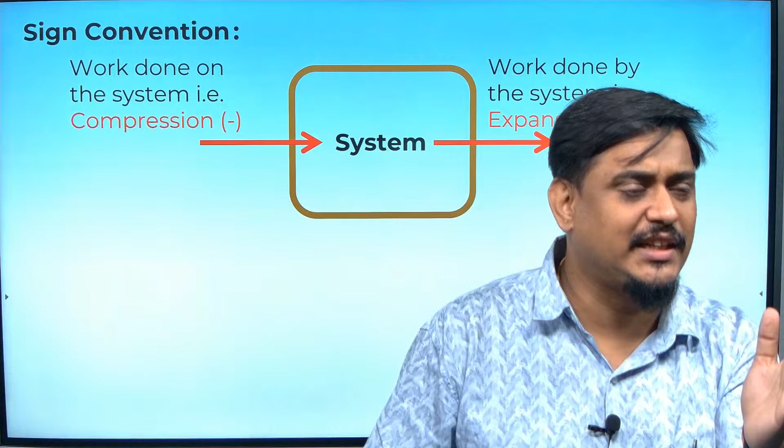Convention is what here? If you take one thing as positive, the other thing will be negative, right? Like in optics, you studied that all distances measured along the direction of the incident ray are taken as positive, and distances measured against the incident ray are taken as negative. I hope you remember this from 10th standard. If somebody takes all distance along the incident ray as negative and opposite as positive, he will not be wrong.

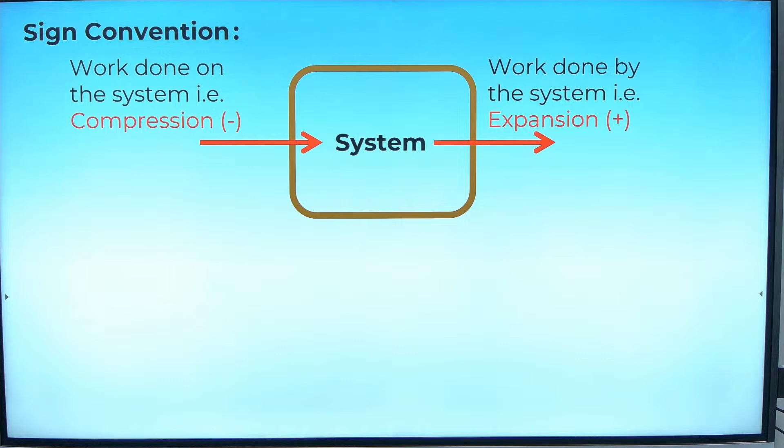Convention is something which is human made, not God made. So what is done? It's taking one thing as positive, the opposite becomes negative. Same way here, if I take heat done, work done on system as negative, then work done by system will become positive. But what you should remember is, if you take a convention one way, you should always take it the same way. So if you see the NCERT book also, the same thing will be written about this convention - it's little different from chemistry's convention.

Yes, heat and work both are energy in transit, which is different from what? Heat, work, and what is the third thing? Energy. So energy is different from heat and work done, because heat and work done are energy in transit, but energy is something which is supplied externally.

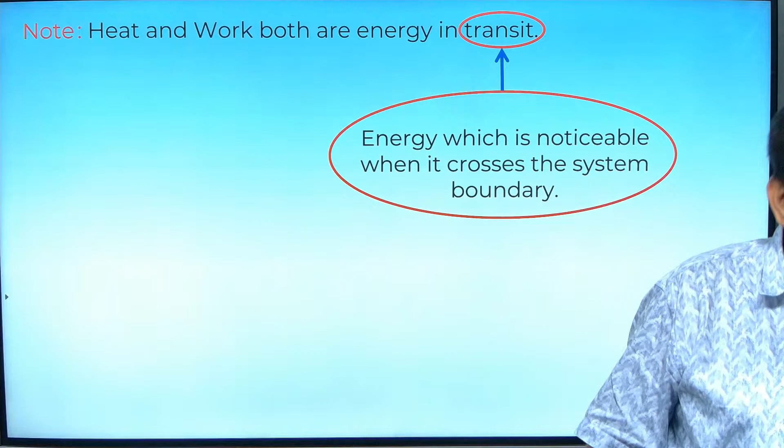Again, it will be confusing - I said to you energy, heat and work all are same. But if I write del Q equals del U plus del W: del Q is the external heat supplied, del U is the change in internal energy, and del W is the work done by the system on the surrounding, or work done on the system by the surrounding - both are possible, right? So del Q and del W are path functions, and del U, the energy supplied, is a state function. These kinds of questions come directly in examinations, even competitive examinations. Remember that - slowly, as you go through some numericals, you'll understand it better.

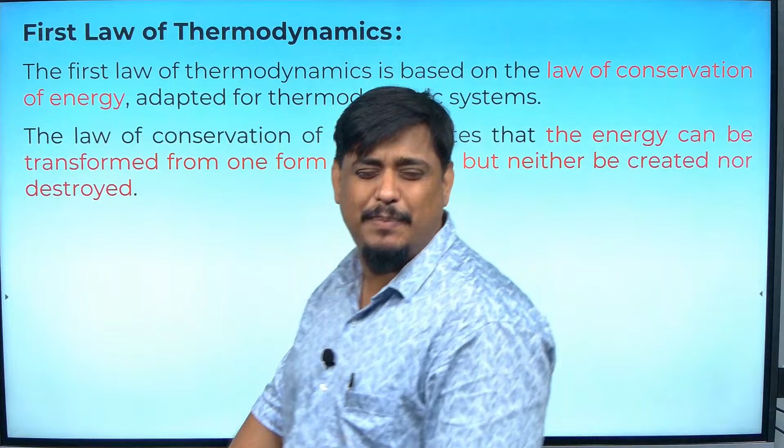So what is the first law of thermodynamics? Very simple way: if I am making a system with a piston, and I am supplying some energy to the system, what will happen? Whatever heat I am supplying, that heat will be called del Q.

If the piston is allowed to move, what will happen? It will go to a new position, isn't it? If it's moving up, there is some work done, and since heat is supplied, there is some change in internal energy. So whatever heat you are supplying is getting utilized in two ways: one way is to change internal energy, second way is to do some work - work done by the system on the surrounding, or vice versa. I hope you are getting my point. This is very, very important - the core of this chapter.

This chapter - zeroth law is child's play, second law again has theories. The whole chapter is basically first law only, remember that. If you fail to understand today, next class will become horrible for you, because there I will talk only about first law - numericals based upon that, processes, everything: isobaric, isochoric. I will tell you the meaning of isobaric process, what is the work done, and what is the first law applied on isobaric process. Same way for isochoric process theoretically - what is the work done in isochoric process, and what is the first law of thermodynamics applied in isochoric process.

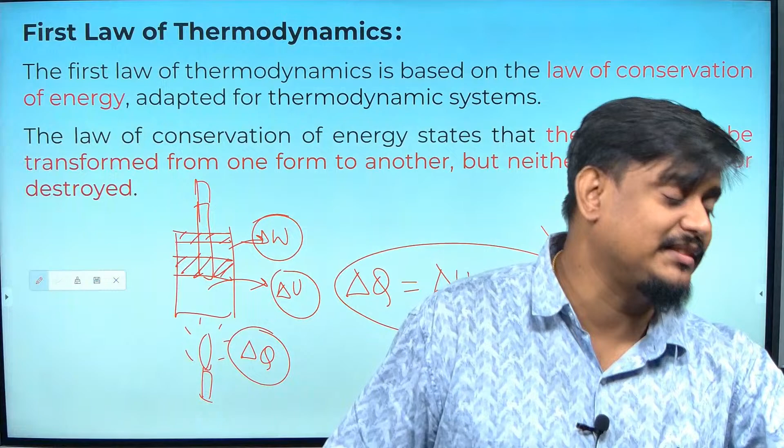First law of thermodynamics is the base of this chapter, it is the backbone of this chapter. Don't fail to understand this. So the same thing they would have written in the form of an equation, where they write del Q is equal to del U plus del W.

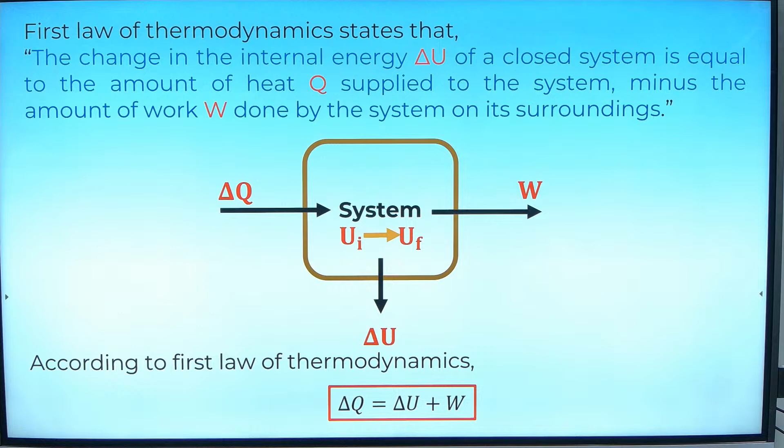Again in chemistry, you study it in a different way, with a negative sign. What you study there: del U is equal to del Q minus del W. How do you study this in chemistry? Same way you study here, same only. Some people have told some minus sign comes, maybe they are writing del U is equal to del Q minus del W. I don't know how, maybe that depends. Anyhow, is this clear to you? I hope you are understanding what is happening here.

So let us go to one question if it is possible. Can you solve this question, everybody? Take 2 minutes of time, to get some confidence, just solve this question. A gas is compressed in a cylinder by a movable piston to the volume half of its original volume. 300 kilojoule of heat leaves the gas and internal energy remains the same. Find out the amount of work transfer. So make it fast.

Sir, I have a doubt, the formula is del Q is equal to del U plus del W, sir. Yes. They said del U is constant, so there's no del U, right? They're saying internal energy remains the same. Fine then, so del Q is equal to del W, right? That's all. The answer is how much? 300 kilojoule? Yeah, 300 kilojoules.

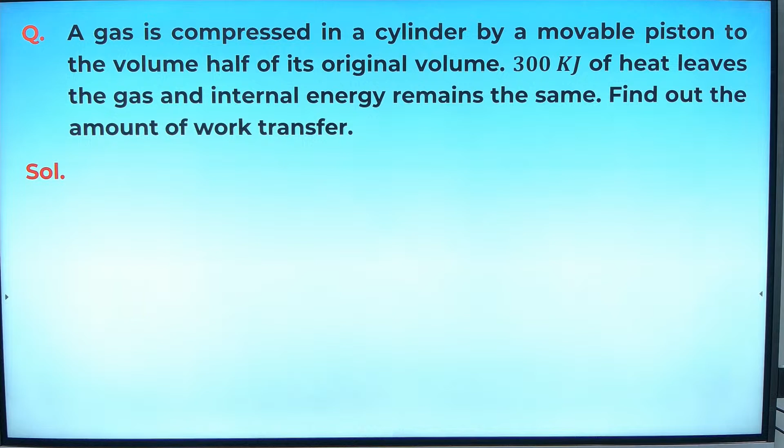Do you agree with him? Everybody else, try. He has given his own answer, it may be right, it may be wrong. Give your own try. Sir, is it 300 kilojoules? Same thing what he said. Pratap? Yes, okay. Others, so even the thing is same, sir. U2 minus U1 is actually... exactly, but see, why it is minus 300? Are you understanding? Because it's compression.

It's half here, it's half. Negative, positive may play a role. They'll get half marks for this minus sign. Your answer is right, Abhinand, but don't forget this negative sign. It depends upon the teacher who is correcting the paper, he may cut full marks also, or if some teacher who is having some mercy on you, they may take half marks from you.

I think today many children are busy celebrating New Year. Already they are in, I don't know what mode, many are absent. And those who are there also, they are waiting for me to go. I don't understand really, New Year means you will do some party, whatever age group you belong to, you have to sleep only by 10 o'clock, but still you have a lot of plans for this New Year.

Okay, anyhow, celebrate, enjoy. I am going to end soon now, because we are going to continue this class in the next session, and many of them are absent. I don't want them to miss entirely, they will not see the video also, so why waste their time? Once again they will ask me to reteach, so for that let us continue next class. Next class, what is remaining is numericals based upon first law of thermodynamics and thermodynamics processes, that is the main part, and then second law and statement, very simple things are remaining. We will do that in the next class.

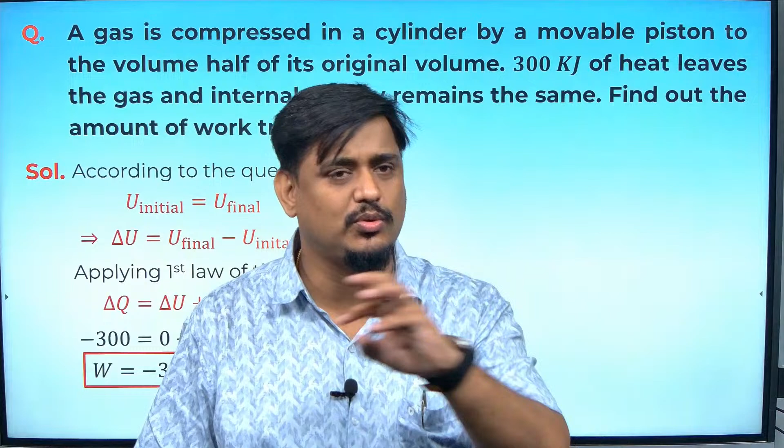See once again, revise once again, and while revising, take all the notes. Today I didn't allow you to take the notes because I went a little fast, you are copying, it is taking time. So I went to complete more portions with you to take the notes later. But don't forget, take the notes. If you don't take, you will miss it, believe me, you will forget tomorrow. So today itself, or maximum by tomorrow, take all the notes.